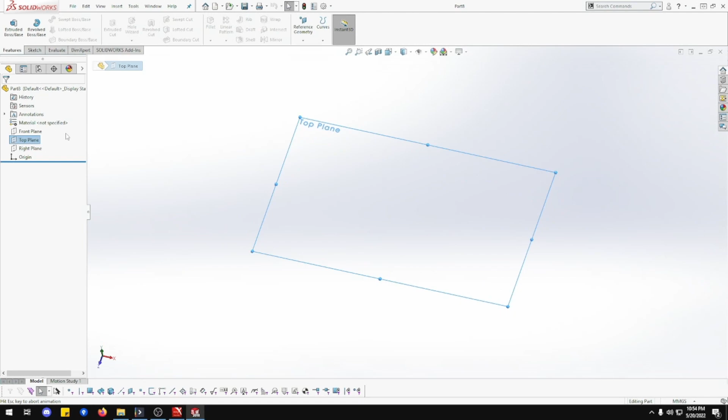We want millimeters. Okay, let's go to top plane, normal to, sketch, and we want square. That looks good. It's going to be 41 by 50, so it's going to be 41 across the top and 50 down the side.

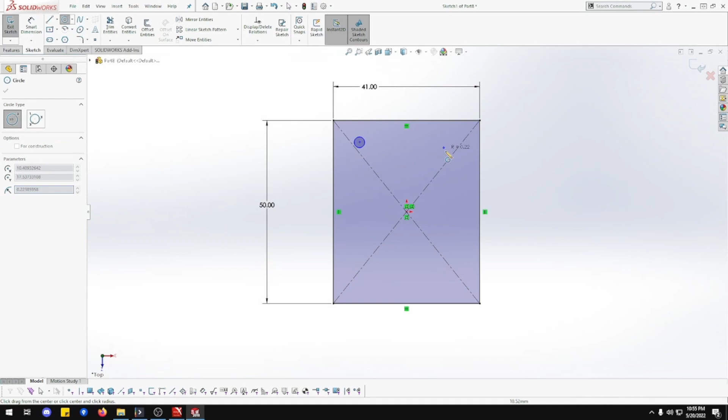Now we want to put 4 holes in there. 1, 2, 3, 4. They're going to be 5 mil. Press escape to get out of that measurement.

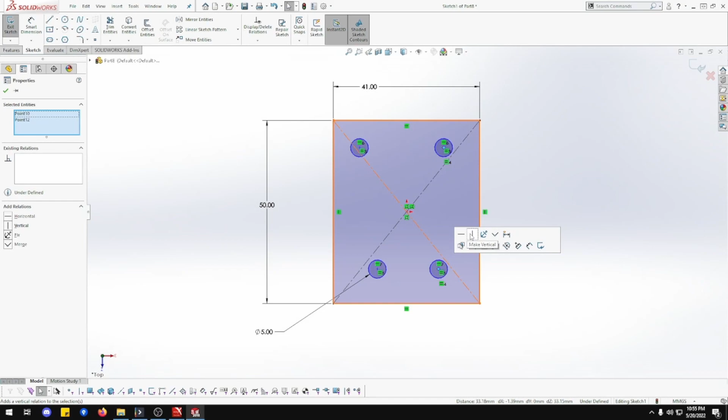Now I'm just going to make these 4 equal to each other. Beautiful. Now this one and this one's going to be horizontal that way. This one's going to be vertical. And these two are going to be vertical. And pop out. There we go. Beautiful.

Okay, so smart dimension. These two, it's going to be 25. This, from the circle to the edge, is going to be 8. And these are going to be 34.

So this should be 8 there. 8.54, that's interesting. I think it's 8. Hold on. Oh, hold on. Bing, bing. Cancel.

Yeah, I haven't done the one down yet. I think I've done it, but that's the cross one. So this should be 8, yep. Boy, never hurts to double check stuff. Oh no, not that one. 8, there we go. Yeah, that's why it never hurts to double check, because this one here I think was going down, it's going across.

Okay, so now we've got that. We want a radius of 4 by looks. Actually, you know what? I'm going to do this as a bevel.

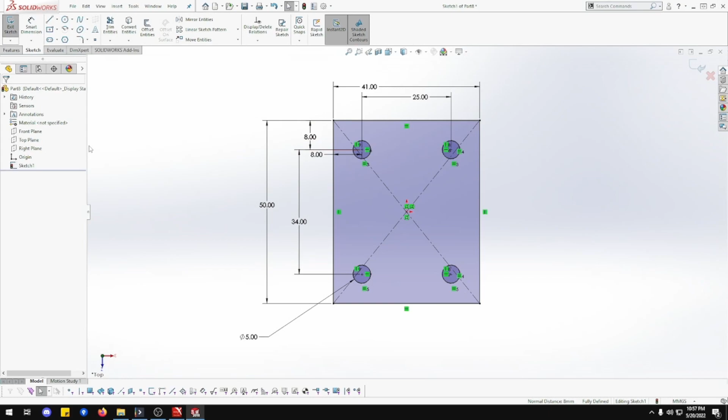So right now we go feature, extrude. It's going to be 5 millimeters thick. And it's going to be mid-plane.

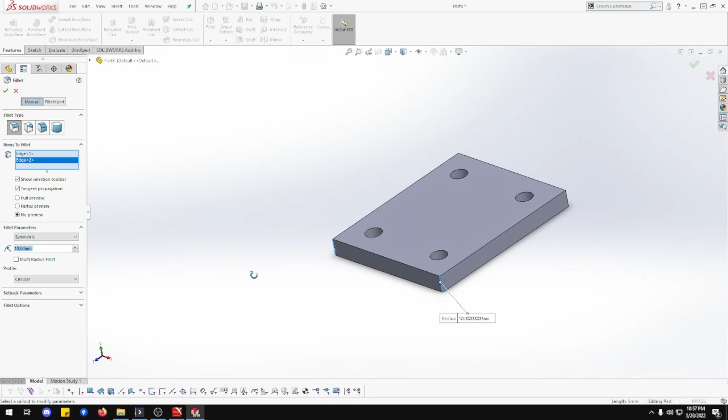There we go. Now we do, nope, not that one. Fillet. Let me do that one. That one. And that one. That's going to be 4 mil. And okay, there we go.

Beautiful. So we need, there's no bevels anywhere else. And that is it. So thank you for coming along.